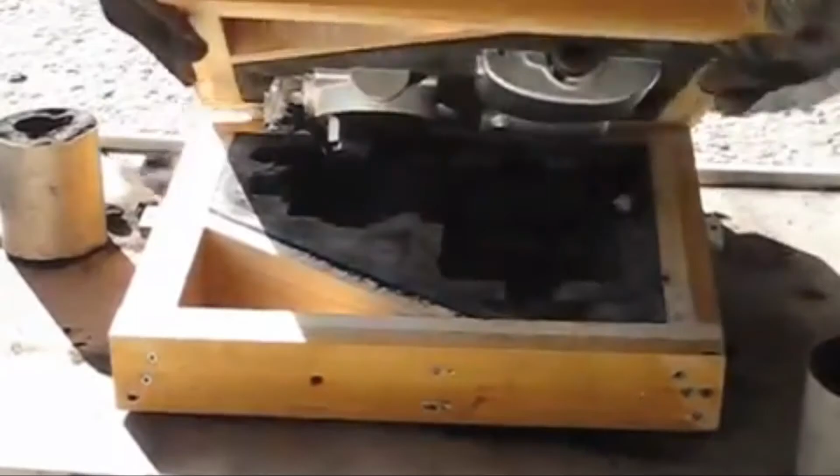The casting process is a very simple process in which we take a molten metal, pour it into a cavity, and allow it to solidify, giving us a desired outcome.

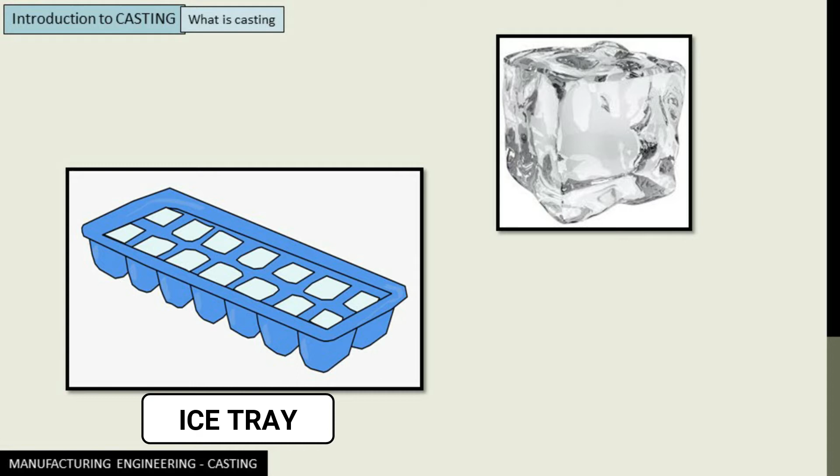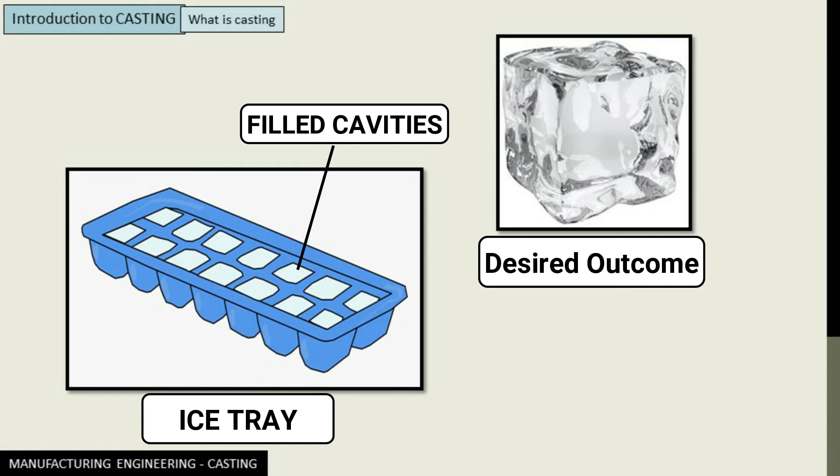In our day-to-day life, ice making is the best example of casting. We take a tray in which water is poured. The water fills the cavity present in the tray, and this cavity is a replica of the shape of the desired outcome, which is the ice cube itself. The water inside solidifies due to the freezing action of the refrigerator, and finally we get an ice cube.

The raw material in ice making is water, the equipment used is called the ice tray, and the output is the ice cube. In metal casting, a very similar process, the raw material is the molten metal or liquid metal, the equipment is known as a mold, and the output, which can be of any shape or size, is known as a casted component.

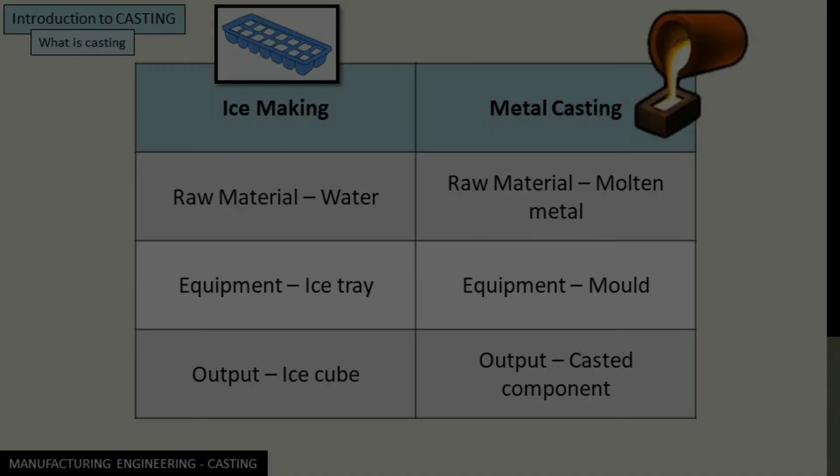Now let's understand the proper definition of casting. The traditional definition is that it is a process in which molten metal is poured into a cavity whose shape is similar to the desired casted component, and this casted component is obtained by breaking the mold.

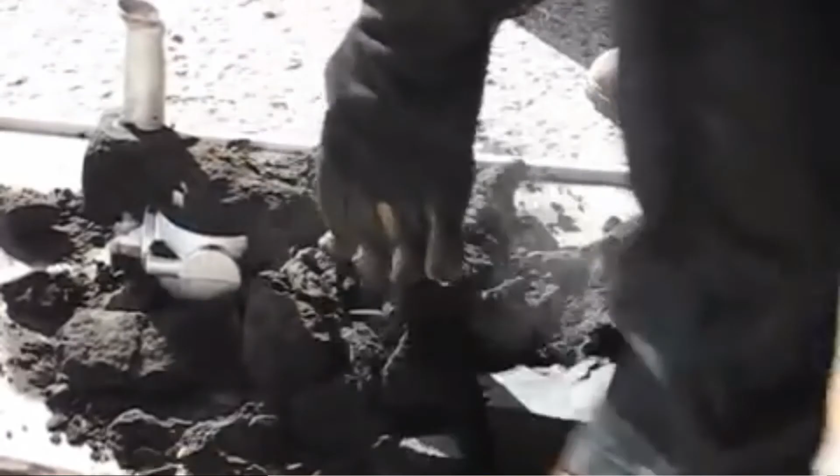There are several advantages and disadvantages of casting processes. First, they are cheap and easy. Small to large components can be manufactured via casting, and complicated shapes can also be made. However, avoiding casting defects is completely impossible. Surface finish is not too good, you get less dimensional accuracy, and further machining is required almost all the time in traditional casting.

Now what is this traditional casting process? When I use the word traditional, I mean sand casting. Sand casting is the most used casting process nowadays, but there are other processes as well, like die casting and shell molding, which we will discuss after completing sand casting.

Now let's understand what is happening in this process. Let's take an example: let's say this is the desired outcome, this is what we want our casting component to be. For that, an almost similar cavity has to be made, since a replica is not the exact same thing. This cavity is made inside the equipment, the complete setup, which is known as the mold. And how is this cavity made? It is made with the help of a pattern.

This is a simple representation and demonstration of the casting process. As we proceed further in the course, you will get to know each and everything in much more detail. This is just the very basic explanation, the very basic demonstration.

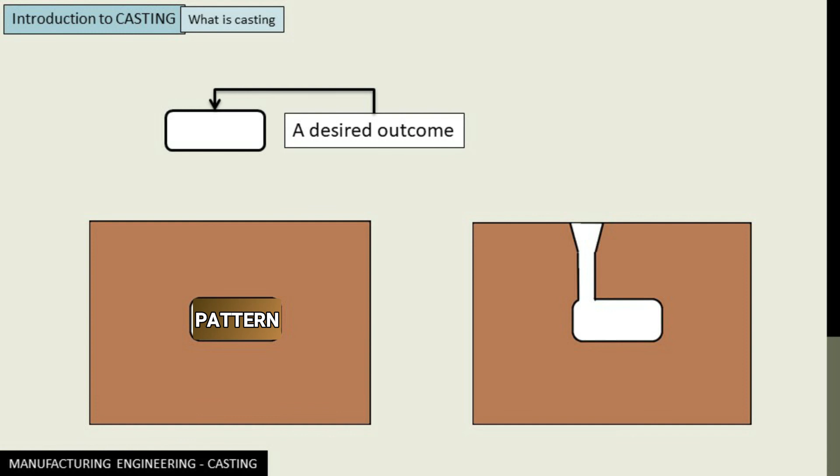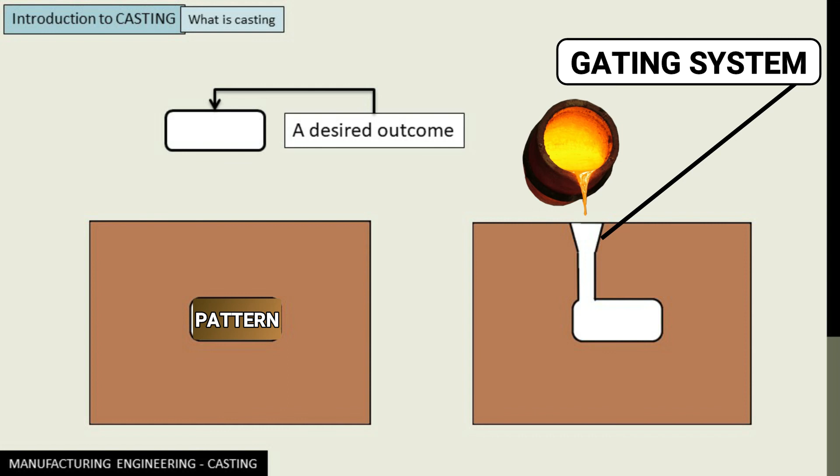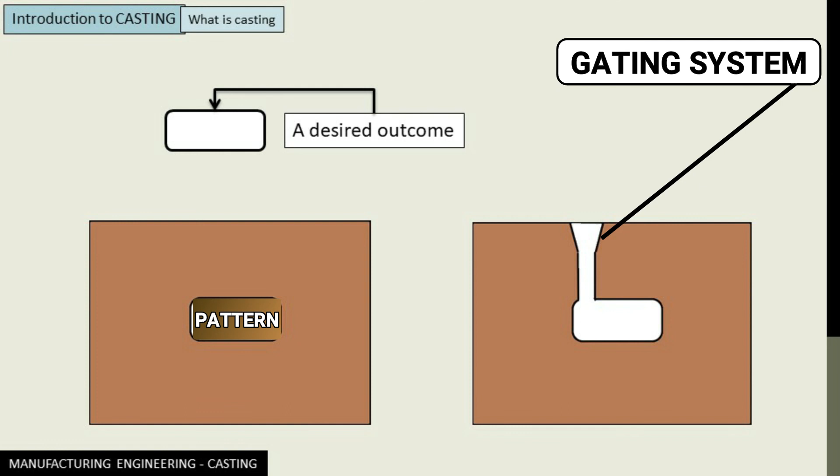This cavity has been made with the help of a pattern. Now, for pouring the molten metal, you need to provide some passage, and that passage is what we call the gating system in casting, through which molten metal will be poured to fill the cavity. It takes the approximate shape of the desired outcome, because further machining is bound to happen in every case. As soon as the metal solidifies inside the cavity, you get your desired outcome.